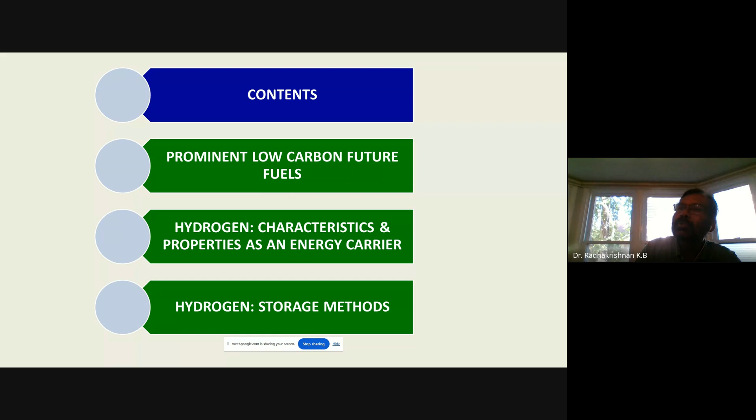So these are the contents that I have organized for the presentation. To begin with, I will be talking on the prominent low carbon future fuels, and then moving on to hydrogen, its characteristics, properties as an energy carrier, and also the pros and cons and the different types of storage systems. So this is what I would like to share with you in this talk today.

So actually what is being given is an approach to decarbonizing with the future fuels. We know that low carbon fuels are alternative fuels that release significantly lower greenhouse gases compared to conventional fossil fuels like coal, gasoline, or diesel over their life cycle.

These low carbon fuels play a crucial role in decarbonizing the hard to abate sectors, meaning majorly the industry sectors, aviation, shipping, and the long haul transport sector. A pragmatic approach to decarbonization is to have a step-by-step pathway to decarbonize the sectors that cannot be easily electrified using low carbon energy sources. So the target sectors are the hard to electrify sectors, which include aviation, heavy industry, and shipping.

So many of these sectors are really hard to electrify or to replace with low carbon fuels. The approach here is to go for future fuels that help reduce emissions without compromising on performance, and also to maintain and preserve the operational benefits. And also we have to encourage the use of existing infrastructure that avoids massive technology changes.

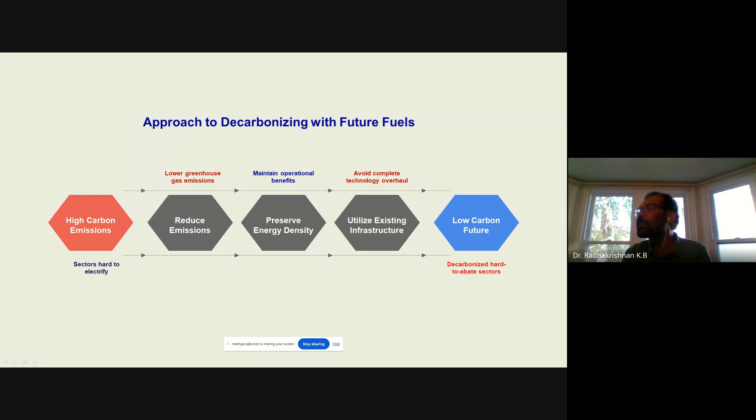So by definition, we can say that low carbon future fuels are energy carriers designed to replace fossil fuels in the hard to electrify sectors, while reducing greenhouse emissions.

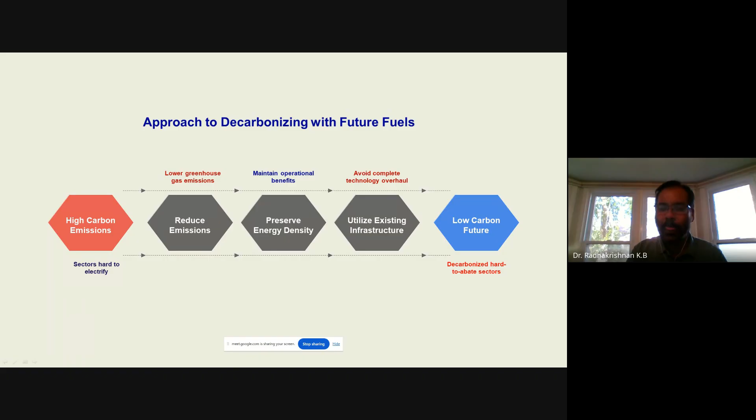Now, what are the prominent future fuels? Of course, there are a host of prominent future fuels. Out of this, hydrogen comes at the top. I think discussions have taken place in this FDP on hydrogen, so please excuse me if there is any repetition of the contents.

So hydrogen, or we can say green hydrogen produced through electrolysis using renewable energy sources, is considered the cleanest alternative fuel. Its production process involves using electricity generated from sources like solar, wind, hydropower to split water molecules into hydrogen and oxygen. These are the very fundamental things which every one of us know about it. The absence of carbon emissions during both the production as well as the combustion stage makes it an environmentally attractive option. So that is about the hydrogen part.

And next comes ammonia, which is also a low carbon, low emission future fuel. Ammonia is often synthesized from hydrogen and nitrogen through the well-known Haber-Bosch process. The traditional Haber-Bosch process actually relies on fossil fuels, but using green hydrogen in this process results in green ammonia. So ammonia also offers advantages over pure hydrogen in terms of storage and transportation, because it is easier to liquefy this ammonia and transport it in bulk

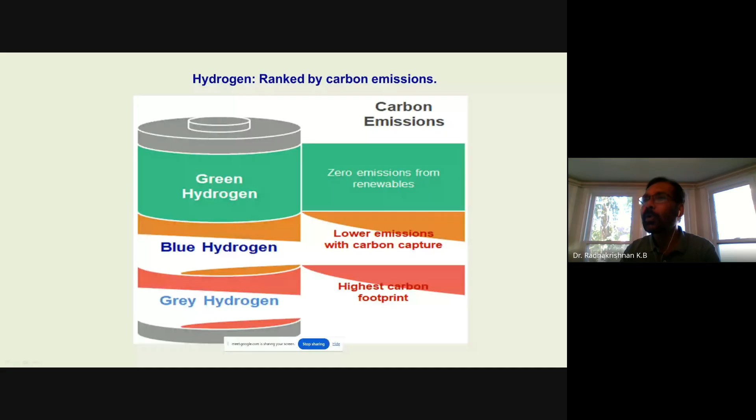But it is not considered a low carbon fuel, because the raw material used is natural gas.

We also have other colors of hydrogen: brown and black hydrogen. These are produced from coal gasification without any carbon capture technology. The distinction between black and brown is that black hydrogen is produced from bituminous coal, whereas brown hydrogen is produced from lignite. The process involves reacting coal with steam and oxygen at high temperatures to produce a mixture of gases, including hydrogen, carbon monoxide, and carbon dioxide.

This mixture has to be separated using appropriate methods. As to emissions, this method is the most carbon intensive way to produce hydrogen, as all the carbon dioxide generated is released into the atmosphere. Nothing is being captured in the black hydrogen segment.

Now we have purple, pink, or red hydrogen, produced by the electrolysis of water using nuclear energy. Next is yellow hydrogen, produced using a mix of energies - grid electricity using fossil fuels, coupled with other renewable sources of energy. The hydrogen produced this way is called yellow hydrogen.

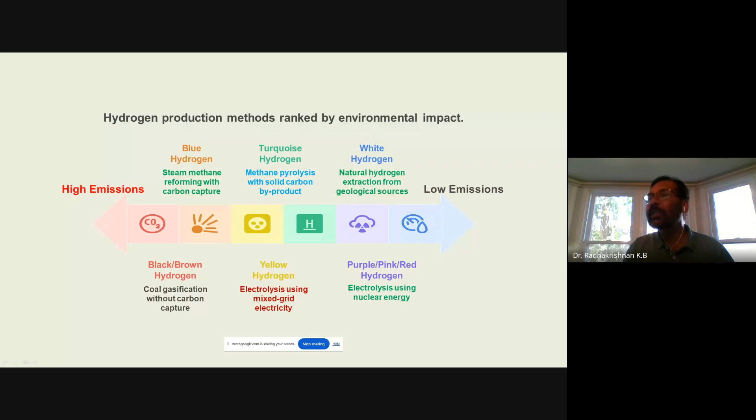The next color of hydrogen is white hydrogen. This is the geological form of hydrogen. Recent reports indicate this form of hydrogen is available in some geological formations in certain countries as hydrogen seeps. So white hydrogen is not produced through any industrial process, but is extracted directly from natural sources. The emissions associated with white hydrogen are primarily related to the extraction and purification, meaning the form of energy used for extraction. So if we use renewable energy sources for extraction, this color of hydrogen doesn't have any emissions.

Now, moving on from hydrogen, we can go to sustainable fuels. What are sustainable fuels? You can categorize a fuel as sustainable if it adheres to stringent regulations set by US or European standards. For a fuel to be fully or truly sustainable, it has to meet some requirements. It has to avoid land use change, meaning we should not use any raw material which causes deforestation or habitat loss. Secondly, we have to use non-food feedstocks wherever possible. Thirdly, we have to reduce the life cycle greenhouse gas emissions during the entire life cycle of the fuel. It also has to be part of the circular bioeconomy, and the use and consumption of water and fertilizers needs to be minimized.

These fuels have to comply with regulations like the European Union RED II, that is the Renewable Energy Directive, and another regulation of the US, the Renewable Fuel Standard, US RFS. So these are the two major regulatory frameworks that govern the production, blending, and sustainability of biofuels in the European Union and the United States.

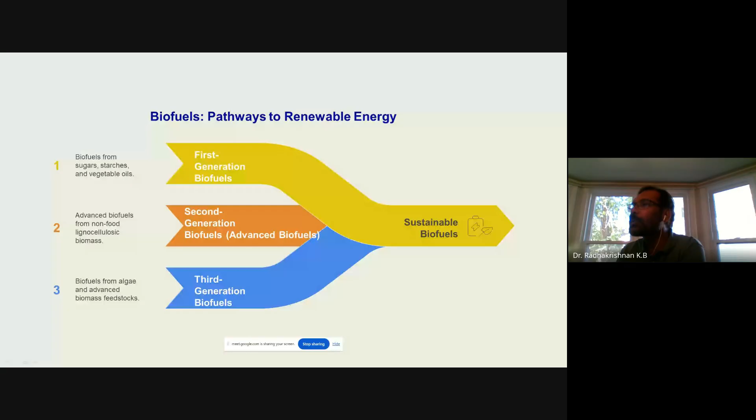Some of these technologies are called BECCS technologies, that means bioenergy plus carbon capture technologies. So these are the different generations of biofuels.

Now the pathways - what are the pathways to attain sustainable biofuels? These refer to the different technological and biological routes used to produce biofuels from renewable biological sources like plants, agricultural waste or crops, algae, or even municipal waste. But we have to ensure low carbon emissions and sustainability across the life cycle of the product.

Bioethanol, as mentioned, is produced by fermentation to convert sugars into ethanol using enzymes or microorganisms. That's the route we adopt in bioethanol production, which involves pre-treatment, enzymatic hydrolysis, and further fermentation. Bioethanol can also be used in blending with gasoline or petrol.

In India, we have set targets for bioethanol blending. Currently, in 2024, the target percentage of bioethanol to be mixed with petrol was 20%, but we nearly reached around 19% last year.

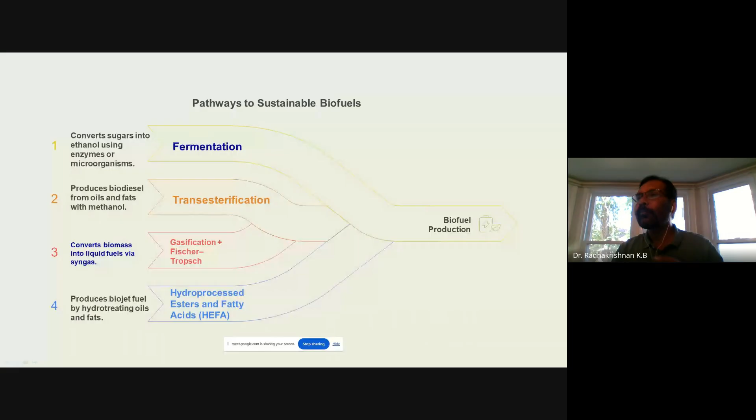Next is another technology on low carbon or future fuels - the Power to X technologies, called PTX technologies. On the left side is power, and on the right side you can have X - X could be anything. This refers to a family of processes that convert surplus renewable electricity, mainly from solar, wind, or hydropower, into energy carriers, fuels, or useful chemical products. Whenever we have surplus energy, this could be used to produce chemical energy carriers, fuels, or chemical products. This concept is increasingly important in the transition towards a low carbon economy. This technology enables sector coupling - connecting the power sector with the transport sector, industry sector, and heating application sector.

In Power to X technology, power means electricity generated especially from renewable energy sources, because renewable energy sources are intermittent. So whenever we have surplus energy, it could be converted into energy carriers, fuels, or useful chemical products. There are many technologies available under this heading, and out of these, some I would like to talk about.

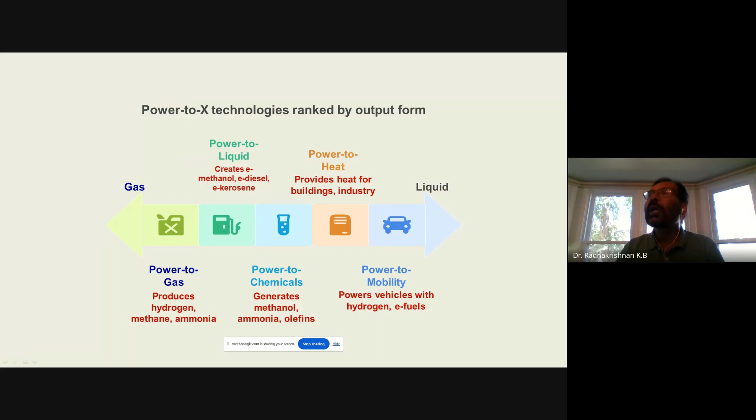Now let's look at how power to X technology is implemented, and what the pathway is. The pathway involves converting intermittent renewable energy into storable chemical fuels, P2X. This approach is used whenever we have surplus energy or energy available with intermittency, since solar and wind are not available all the time, only at selected times. So producing excess energy and then storing the surplus energy for later use can be beneficial. In such cases, we resort to power to X for low carbon fuels.

This involves mainly four steps. First is electrolysis, where we mainly focus on producing hydrogen from water electrolysis. This green hydrogen, obtained from electrolysis, becomes an energy carrier. Next is carbon dioxide, which can be obtained from many sources, but in power to X technologies, we only use captured carbon dioxide, either through direct air capture or from industrial emissions and flue gases. So we have two raw materials available: hydrogen and carbon dioxide.

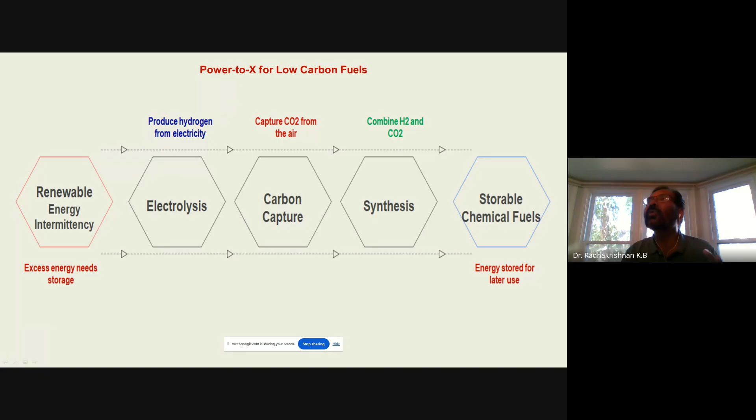Once produced, we move to the fourth stage, which is storage of these storable chemical fuels. These are synthetic fuels that are energy dense. The storable form of fuels has good energy storage potential. Having such high energy density, they are transportable, since a large amount of material can be stored in a small amount of space. We can also use existing infrastructure, and use the surplus energy for later use. So these are the steps, the pathways for P2X technologies.

In this technology, we pay some attention to ammonia under the power to chemical sector, because this is being largely discussed nowadays and has gained acceptance in recent times across many sectors. Ammonia is a chemical carrier of hydrogen. We know that ammonia, the molecular form of hydrogen compound, is NH3, comprising nitrogen and hydrogen.

So ammonia acts as a chemical carrier of hydrogen through a process that involves synthesizing ammonia from hydrogen and nitrogen, the raw materials, and then transporting this ammonia. Whenever we want to use it, this ammonia has to be cracked back to hydrogen and nitrogen at the point of use. The production of ammonia typically involves, as mentioned earlier, the Haber-Bosch process, which is a well-established industrial process.

But it may not necessarily use the hydrogen obtained from renewable sources. Here in this segment, that is power to chemicals, we have to use only renewable energy sources for the production of hydrogen. So solar, wind, or any other renewable energy resources can be used to produce green hydrogen.

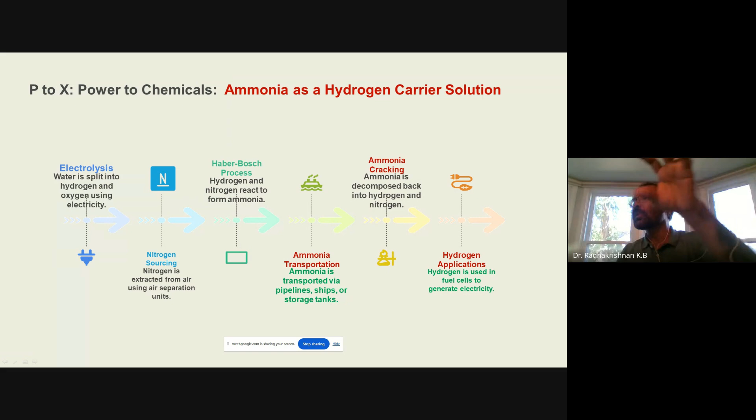So at the point of use, we have to get hydrogen. For that, the cracking of ammonia has to be done. This cracking means conversion of the ammonia at the point of use back into nitrogen and hydrogen. This also involves the consumption of energy.

But remember, we have to use only renewable energy sources for this cracking of ammonia back to nitrogen and hydrogen. The cracking process involves passing this ammonia over a catalyst—catalytic cracking at high temperatures, to the tune of about 700 to 900 degrees Celsius, using various catalysts like nickel, ruthenium, or iron-based catalysts. The choice of catalyst also affects the efficiency and cost of the cracking process.

The resulting hydrogen could be used at the point of application. That means we can directly use it in fuel cells to generate electricity by combining it, and water is the only product obtained in this. So ammonia is a potential

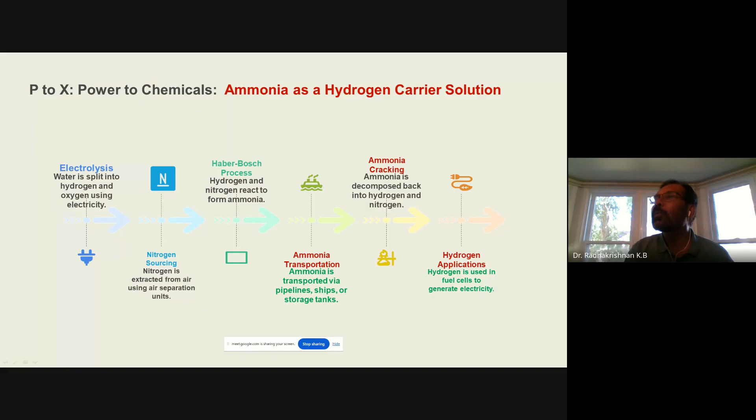future fuel. As to the merits: ammonia is carbon free. Ammonia combustion process produces no carbon dioxide, which means it facilitates decarbonizing sectors like power and transport. We can largely depend on ammonia in the power and transport sector.

And it has got higher hydrogen density. The formula of ammonia is NH3. Around 17.8% by weight of ammonia is hydrogen. This can be stored easily because the temperature needed for liquefaction is only minus 30 to 33 degrees Celsius for ammonia, compared to minus 253 degrees Celsius for hydrogen.

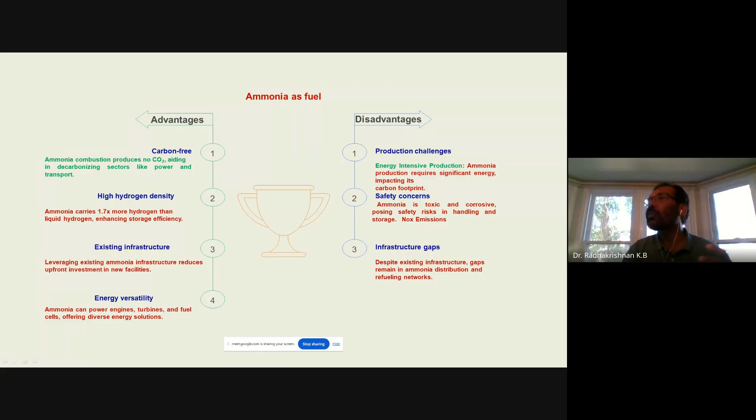Ease of storage also is there for ammonia storage. And also, the energy obtained from ammonia is versatile—ammonia can power engines, turbines, or fuel cells directly, offering diverse energy solutions.

As to the disadvantages, there are many production challenges, because the production of ammonia or green ammonia is energy intensive. It requires significant energy, which impacts its carbon footprint, so we have to strictly use renewable forms of energy.

And also safety concerns—ammonia is toxic and corrosive, posing safety risks in handling and storage. Another important disadvantage is that conversion or partial oxidation of ammonia at the point of use can result in NOx emissions—nitrogen dioxide or nitric oxide emissions. And also we have the disadvantage of infrastructural gaps.

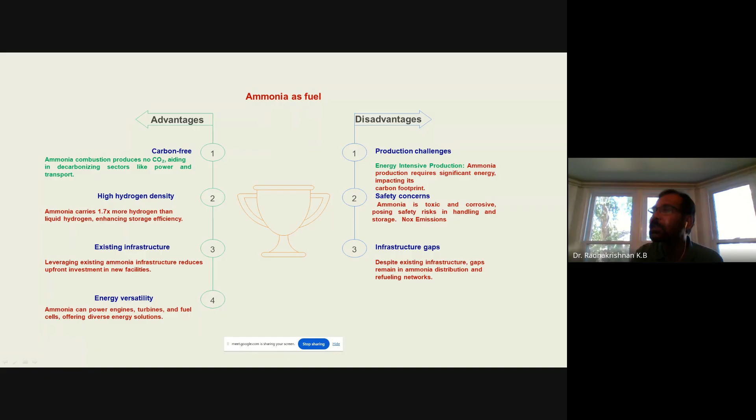We have the existing infrastructure, but still to go on a large scale application of ammonia, gaps remain in ammonia distribution and refueling networks. As to the applications, it can be used as a shipping fuel, the direct fuel in ships, and in power generation. We can use it directly in power plants, and it is used in fertilizer plants.

Now the pathways, as I have already mentioned about the production pathways of ammonia. The main method is the Haber process, but we need to use renewable forms of energy to produce hydrogen as well as nitrogen, so we can synthesize green ammonia. But this process is energy intensive and carbon intensive. Green ammonia production uses renewable energy sources like wind, solar, or hydro to power the electrolysis of water to produce hydrogen, to be used in the Haber process. So the form of energy used in the Haber process has to be fully renewable in nature.

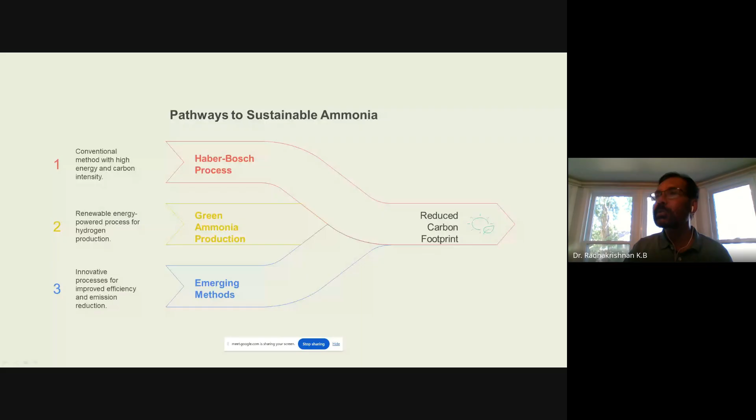Some other emerging methods are also coming in, the electrochemical and thermochemical processes. They have improved efficiency and reduced emissions. Such pathways are also available. So we can say that ammonia has a large role to play in the sustainable energy segment. It is used in power generation, transportation, industrial heating applications, and as a medium for renewable energy storage and transporting renewable energy.

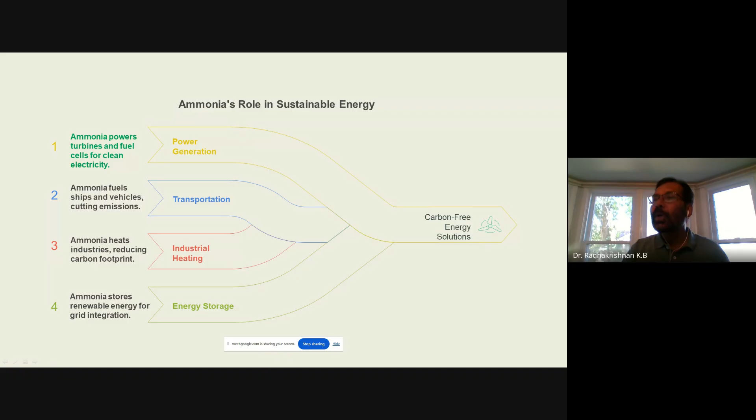Now following ammonia, we have the e-fuels. This also I have already mentioned. This represents a promising pathway for decarbonizing sectors that are difficult to electrify directly, such as the aviation sector or shipping sector. By utilizing captured carbon dioxide and green hydrogen to create liquid fuels, we get e-fuels, or electrofuels.

Many different forms of e-fuels are available, like e-methane. The process is called e-methanation, or electromethanation. It comes under power to X, P2X. Power to methane is a process that produces synthetic methane using renewable electricity, water, and carbon dioxide. Using renewable electricity from water, you generate hydrogen, and the carbon dioxide used is captured from industrial sources or from atmospheric sources.

The main steps involved are the electrolysis process to produce green hydrogen using renewable energy sources, and the methanation reaction to produce synthetic methane using carbon dioxide as a raw material. It is a Sabatier process where the green hydrogen is reacted with the captured carbon dioxide to produce methane and water. The reaction is carbon dioxide plus 4 hydrogen molecules giving methane and 2H2O. This reaction is highly exothermic and is a catalytic reaction taking place on a nickel-based catalyst at high temperature of 250 to 400 degrees Celsius.

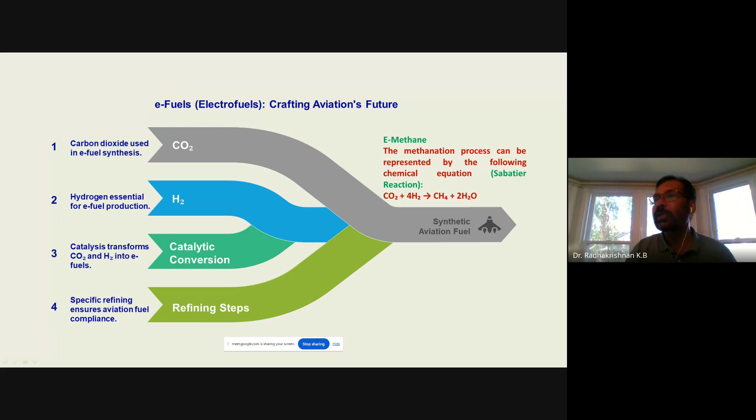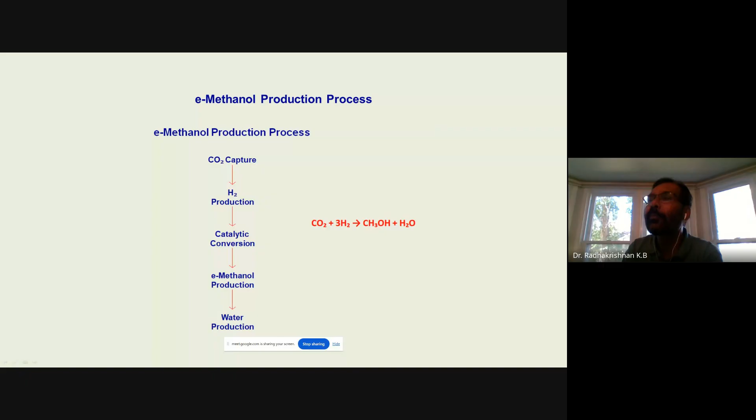In a similar way, we can generate e-gasoline or e-kerosene, sustainable aviation fuels. This is the process for e-methanol. You have to capture the carbon dioxide, produce the hydrogen electrolytically, and combine it in a catalytic conversion process reactor. You can generate methanol, but here also you need separation of this methanol from other gases. So this is the e-methanol pathway.

Methanol has got many applications. E-methanol has a wide range of applications across different segments. It is used as a fuel additive, with methanol blended with gasoline. Our country also is moving in this direction to promote blending, increasing the percentage of ethanol blending in gasoline or petrol year by year. This is a common practice in many countries, used as a sustainable alternative to fossil fuels, for reduction of greenhouse emissions.

Our country has formulated various policies under the National Policy on Biofuels, which was formulated in 2018 and updated in 2022. The target of the blending was 10%, and we achieved this 10% blending in 2022. Now it is 20%, called E20 - a 20% anhydrous ethanol blending target by 2030. That is the target set.

But actually, originally it was set for 2030, but now it is accelerated to 2025.

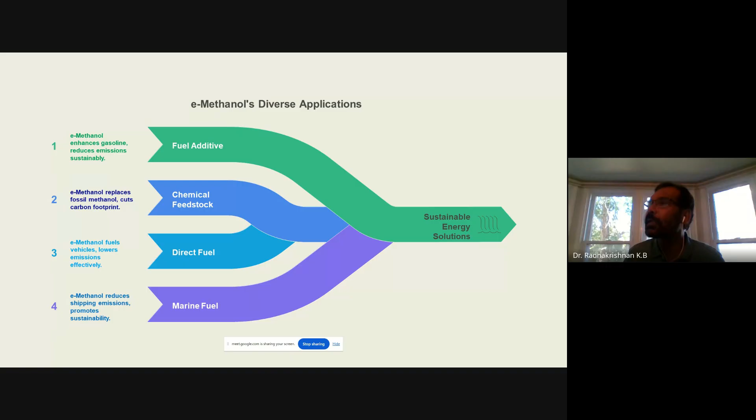E-methanol is also used in the marine fuel segment. This is gaining traction as a marine fuel due to its lower emissions compared to the heavy fuel oil used earlier. So this is a sustainable alternative for the shipping industry, and it helps reduce the environmental impact.

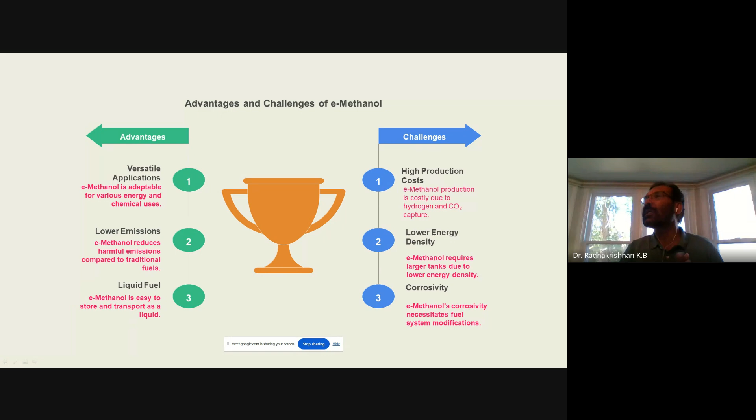As to the advantages and challenges: it has versatile applications, lower emissions, and it can be stored as a liquid fuel. That is another advantage of this methanol.

The challenges include the production cost, because we are using renewable forms of energy. With course of time, we can bring down the costs associated with the production of e-methanol.

The energy density of methanol is lower compared to gasoline, petrol, or diesel. We shall see the numerical figure of this energy density later. That means we need larger fuel tanks to store it. In a given space, you can accommodate only a lesser amount of methanol because its energy density is less.

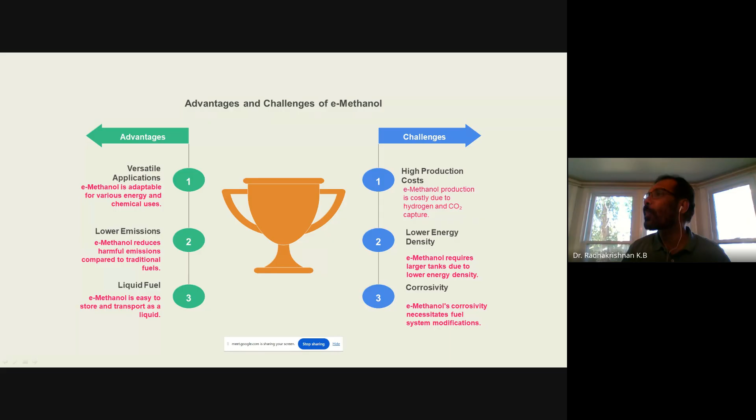Another disadvantage is the corrosivity of methanol. Methanol can be corrosive to various materials, which means this requires modification to the fuel systems and engines.

And next is the kerosene, or synthetic aviation segment. We normally resort to the production of synthesis gas, then the Fischer-Tropsch process. All chemical engineers must be aware of the Fischer-Tropsch process. We can produce many chemicals from syngas production.

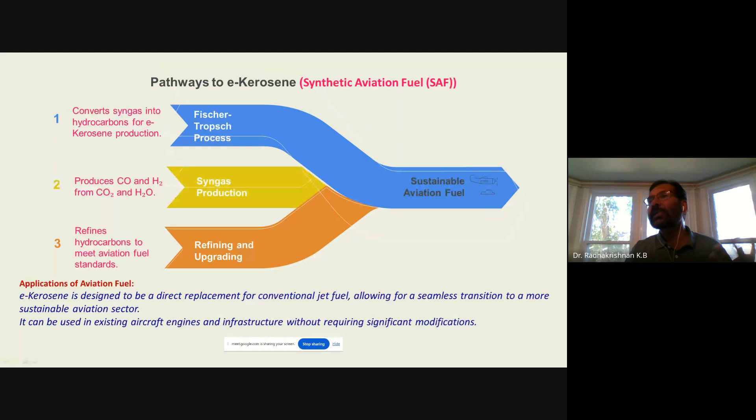If you want to get sustainable aviation fuel, further refining and upgradation is required, meaning purification, because it has stringent conditions to be used as sustainable aviation fuel. So applications of aviation fuel are a direct replacement of conventional jet fuel. This allows for a seamless transition to a sustainable aviation sector, used in existing aircraft engines without subjecting existing infrastructure to modifications.

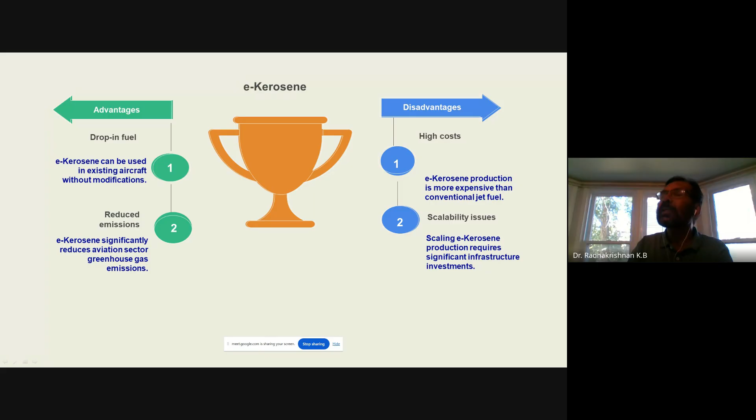E-kerosene also has many advantages. It is used as a drop-in fuel, meaning e-kerosene can be used in existing aircraft without modification. That is one of its advantages. And it has reduced emissions—it significantly reduces the emission of greenhouse gases in the aviation sector.

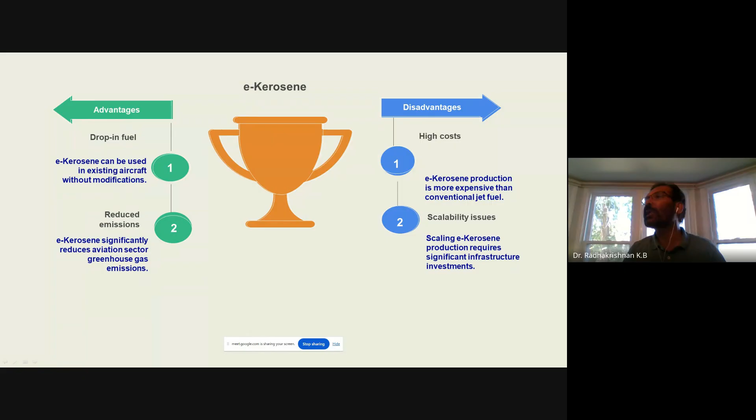The disadvantages are the expensive nature of production compared to conventional jet fuels from petroleum sources, and also scalability issues. Scaling up the production of e-kerosene to meet the demand of the aviation sector requires significant investments in infrastructure and technology. So these are the challenges involved.

And hydrogen, of course, has versatile applications. It can be used in decarbonizing industries, especially the steel making industry. We know the emissions taking place from steel industries are enormous. So we use hydrogen to produce energy to decarbonize the steel industries using the direct reduced iron process.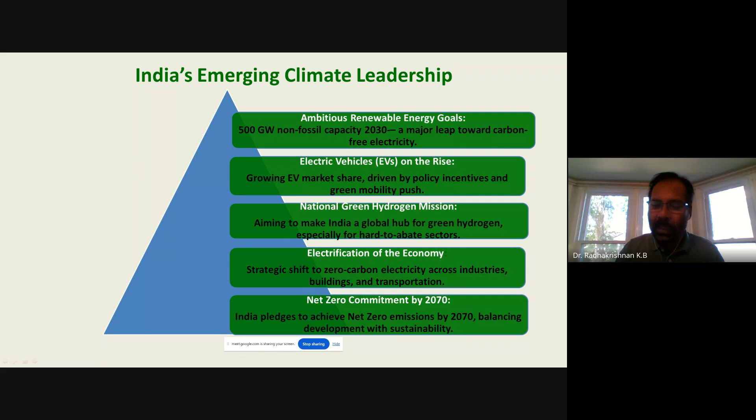India has also set its emerging targets and taken a leadership role in this. Many targets and missions have been set, like the hydrogen mission. We do have our share in controlling climate change, like ambitious renewable energy goals, the promotion of electric vehicles, the national green hydrogen mission, electrification of the economy, and the net zero commitment by 2070. These are some of the leadership roles that India has already taken in this direction.

Now comes the last part of this presentation, that is on hydrogen. Why do we have to go for the hydrogen economy?

Hydrogen is a versatile energy carrier, produced from various sources including renewable energy, natural gas with carbon capture, and nuclear power. It can be used in fuel cells and IC engines. Hydrogen produces water as a byproduct, so it is potentially a zero emission fuel. It is the most abundant element in the universe, making up about 75% of the elemental mass of the universe.

Most of it exists as hydrogen gas in stars, where it is the main fuel for nuclear fusion, like the sun. 90% of the number of atoms in the sun is hydrogen. In general, the sun contains 74% hydrogen and 24% helium by mass.

So hydrogen is not an energy source by itself, like fossil fuels or sunlight, but it is more like a battery - it stores and delivers energy. We use electricity, ideally renewable, to split water into hydrogen and oxygen via electrolysis, storing the energy from the electricity. We can release the energy by combining the hydrogen and oxygen in a fuel cell or burning it to produce the byproduct water.

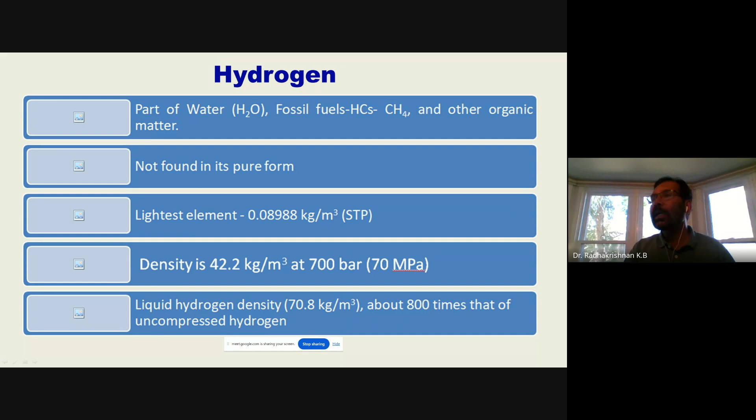So why is hydrogen used? As said earlier, hydrogen is an abundant and clean fuel with a gravimetric energy content of about 122 to 142 megajoules per kg. This is much higher compared to diesel or other fuels - about 3 to 3.5 times that of conventional fuels.

As said earlier, combustion of hydrogen does not produce any carbon dioxide, so hydrogen has got global acceptance as an environmentally safe fuel.

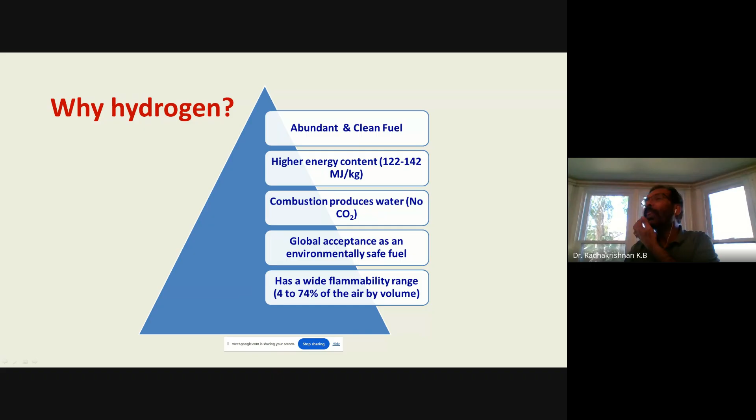Now, looking at the properties of hydrogen is very important. I will touch upon some of the very important properties that are essential to look at.

Its boiling point is about minus 252 or 253 degrees Celsius, which is about 20.28 Kelvin. So hydrogen has a very low boiling point, necessitating liquefaction at cryogenic temperatures for efficient storage and transportation in liquid form. So cryogenic storage is required.

It has a lower heating value of about 120 megajoules per kg, that means 33.3 kilowatt hours per kg - every kg of hydrogen can generate about 33.3 units of electricity. So hydrogen possesses one of the highest energy contents per unit mass compared to all fuels.

On the higher heating value - I'm not explaining exactly what higher heating value or lower heating value means - this is with the vaporized water vapor component, which has a higher latent heat of vaporization, so the heating value increases. The higher heating value is 142 megajoules per kg.

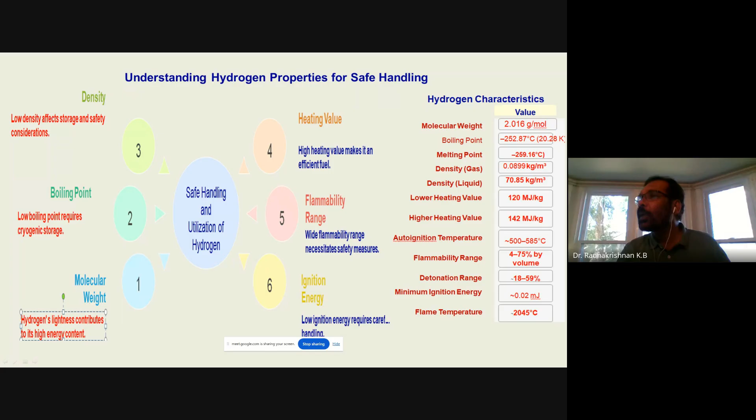Hydrogen combustion produces a very high temperature flame, more than 2000 degrees Celsius. This is highly beneficial for certain applications, but also requires appropriate materials to withstand the heat. The detonation range is also destructive, so we have to be careful about handling this.

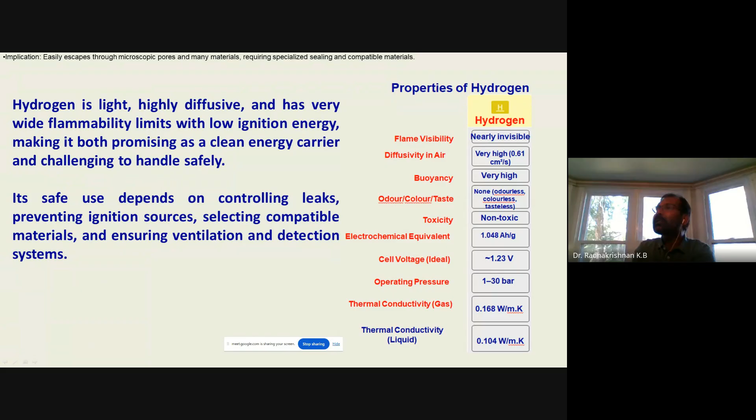In general, hydrogen has very high diffusivity and permeability. It can easily escape through very small pores in many materials. We cannot use conventional materials for storing hydrogen; this requires specialized sealing and compatible materials.

Hydrogen can cause burns because the flame is invisible, sometimes pale blue. The radiant heat is low, so you never get hurt if you approach near it, but direct exposure is hazardous. Since flames may be difficult to see, you have to use either UV detection systems or infrared sensors, which are highly essential.

The burning velocity of hydrogen is also very high, about 2.65 meters per second. Compared to methane, which propagates at only about 40 centimeters per second, hydrogen flame propagates at about 2.65 meters per second, so hydrogen detonations are more violent.

Another problem with hydrogen safety is cryogenic hazards with liquid hydrogen, since we use extremely cold conditions, minus 253 degrees Celsius in storage. This causes frostbite, cold burns, and hydrogen embrittlement of materials. In cold storage, it also causes boil-off and pressure build-up because it evaporates very fast, so storage systems require pressure relief valves.

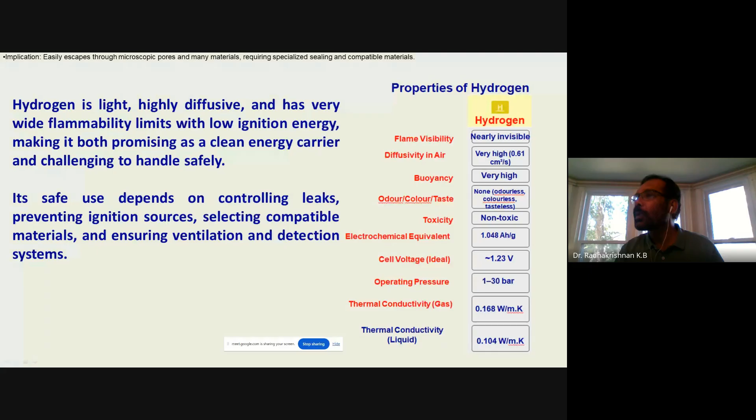Material compatibility is also very important. We use special stainless steels and special aluminum materials; high strength steels are avoided. Even the gaskets and seals we use—many common elastomers—are permeable to hydrogen, so we have to use special purpose materials for this.

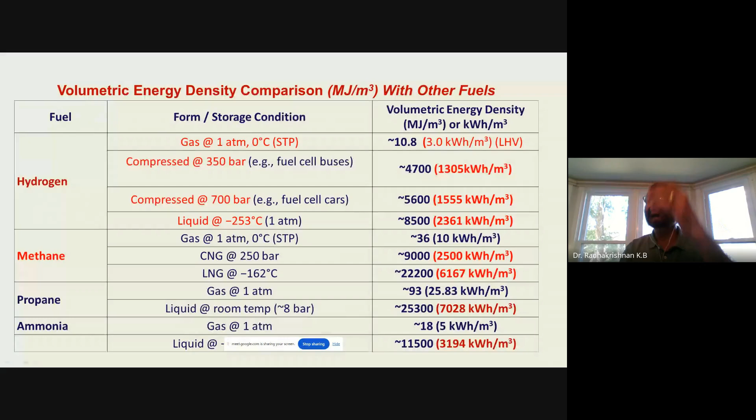This table gives a comparison of the volumetric energy density with respect to other fuels: hydrogen, methane, propane, and ammonia. At ambient conditions, hydrogen has an extremely low volumetric energy density of 10.8 megajoules per meter cube, which is far below methane, propane, or ammonia.

When compressed to 350 to 700 bars, or liquefied at cryogenic temperatures of minus 253 degrees Celsius, hydrogen acquires a higher volumetric energy density of about 4,700 to 8,500 megajoules per meter cube. But this is still significantly lower than liquid hydrocarbons, which have an energy density of more than 22,000 megajoules per meter cube, and liquid propane used for domestic applications, which has an energy density of about 25,000 megajoules per meter cube.

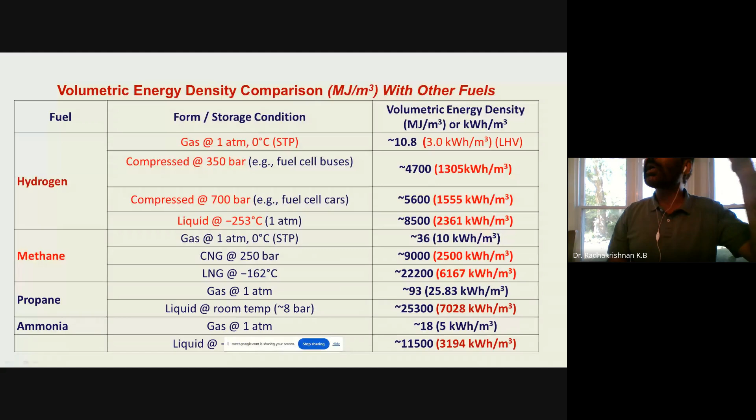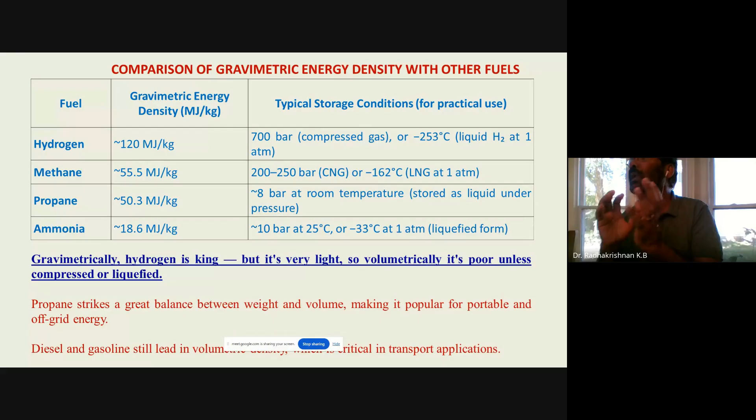Even ammonia has a volumetric energy density of 11,500 megajoule per meter cube, so that is one of the limitations of hydrogen. But this table gives a comparison of the gravimetric energy density. Hydrogen has got an excellent gravimetric energy density. So we have to strike a balance between weight and volume. Gravimetrically hydrogen is the king, but it's very light, so volumetrically it is poor.

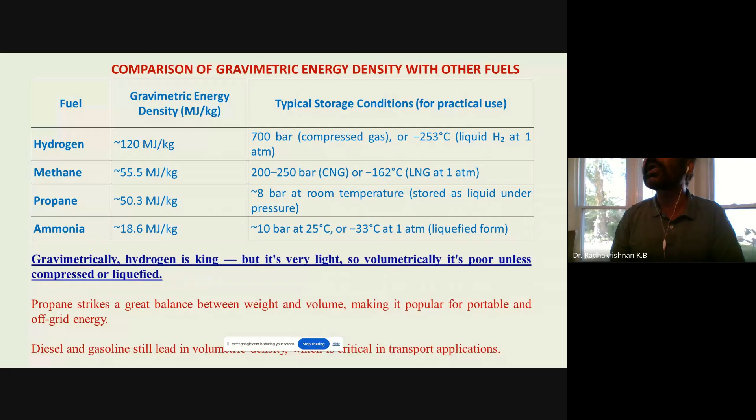In terms of explosive limit, this gives a comparison of the explosive limits of various fuels. For hydrogen, the flammability range, between the lower and upper flammability limits, is 4 to 75%. Whereas acetylene's range is between 2.5 and 100 percent.

In conclusion, hydrogen exhibits good engine performance, flame propagation length, and improved power output. A larger explosive limit has advantages for performance, especially in combustion systems, so hydrogen is used in rocket engines because of this larger explosive limit.

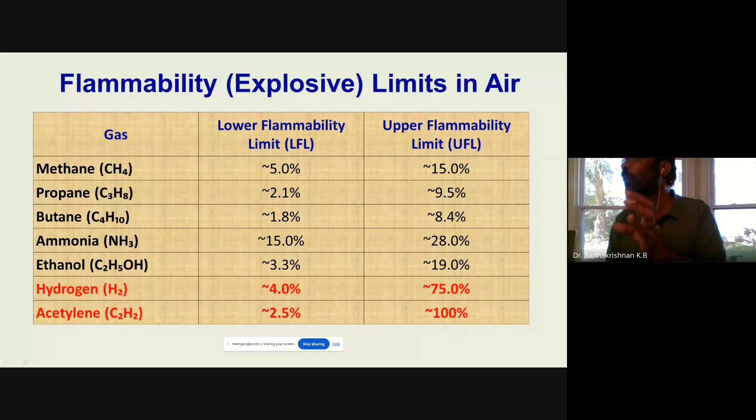And the higher inflammability range means higher safety risk, so this requires robust handling, storage, and detection systems. There has to be a trade-off between all this—great for controlled energy systems, but potentially hazardous if not managed properly.

As I said earlier, hydrogen, in a nutshell, is an energy carrier, not a primary energy source. It is derived from many other sources, so hydrogen can be considered a secondary source—an energy carrier that stores and transports energy.

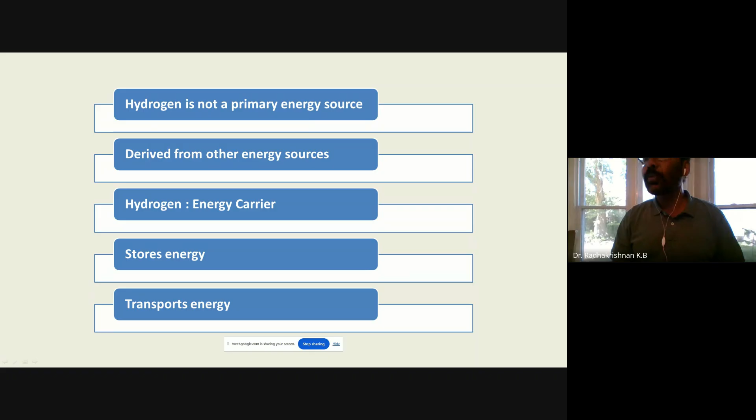The challenges are many in hydrogen storage, with different storage technologies used. We have compressed hydrogen storage to enhance the density to 42.2 kilogram per meter cube; if compressed to 700 bars, it's used in mobile transport in trucks, rails, and underground pipes. Liquefied hydrogen storage is available provided you cool it down to minus 253 degrees Celsius.

There are many other storages. Secondary chemical carriers include ammonia, and another chemical storage called liquid organic hydrogen carriers, LOHCs, because it's liquid. Some liquids can absorb this hydrogen, and the absorbed hydrogen could be retrieved at the point of use by providing additional energy to it.

Another form of energy carrier is ammonia, also a chemical form of hydrogen storage. Methanol is again a chemical form of hydrogen storage, and we also use metal hydrides as another storage method.

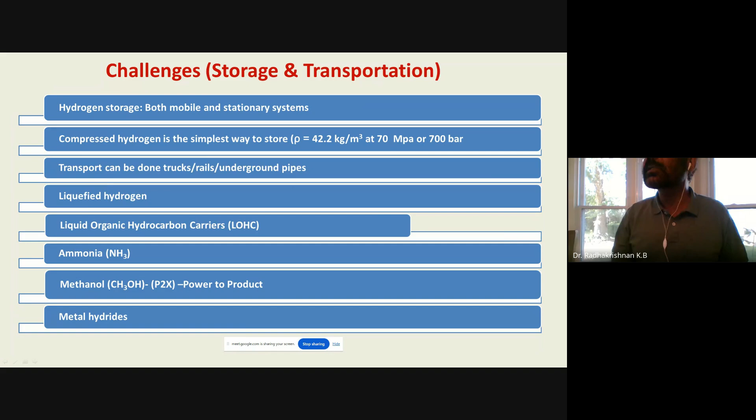Now I'll wind up in a few minutes. As for storage, hydrogen as a gas requires pressures to the tune of about 350 to 700 bars—that's the desired tank pressure. If you want to use it in buses, we can use it at 350 bars. For cars, the pressure range involved is very high because only a small storage volume can be made available in a car to run large distances.

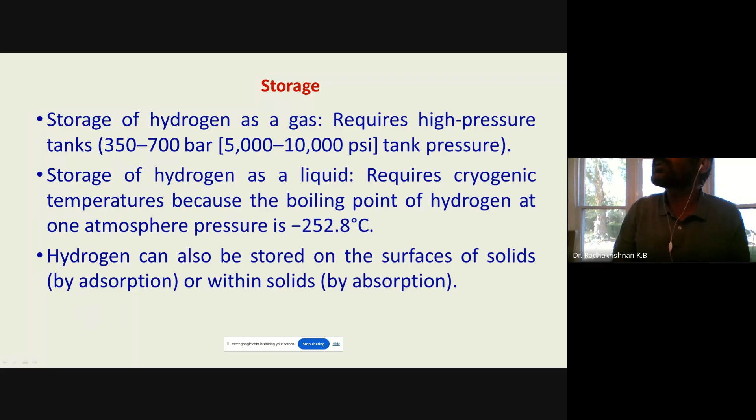In liquid form, it has to be cooled to cryogenic temperatures down to minus 253 degrees Celsius. Hydrogen can also be stored on the surface of solids like metal hydrides, or within solids by absorption. Many technologies are available—these storage systems are physical based or material based.

In physical based storage, you can compress the gas using cold compression techniques, or store it in liquid form. In material based storage, we have many technologies: adsorbents, metal organic frameworks available to store hydrogen, liquid organic systems, and different forms of metal hydrides like complex hydrides, chemical hydrogen systems, and interstitial hydrides. These systems have their own merits and demerits.

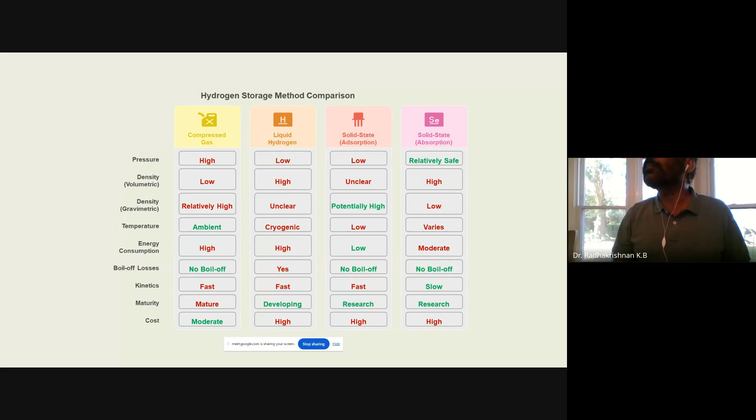In general, physical storage methods such as compressed gas and liquid hydrogen are technologically mature and can deliver higher densities, but demand either extremely high pressures or cryogenic temperatures. This leads to energy intensive and complex storage systems.

But material-based storages like adsorbents or liquid organic hydrogen carriers, or metal hydrides or chemical storages, have problems including volumetric efficiency, safer handling issues, and integration with existing liquid fuel infrastructure.

However, we can say these approaches are still limited by slow kinetics. Metal hydrides have very slow kinetics involved, so we need higher regeneration temperatures while regenerating hydrogen from these hydrides.

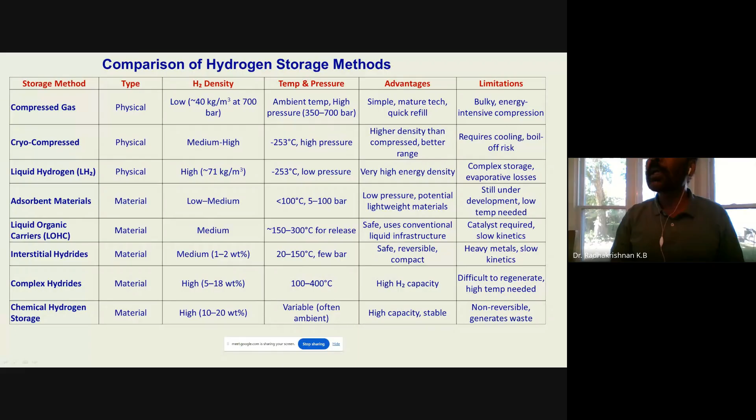Because of incomplete reversibility, we cannot retrieve a complete amount of hydrogen that has been absorbed in the metal hydride. So chemical hydrogen storage refers to materials or compounds that store hydrogen in chemical form, which can release hydrogen through chemical reaction. These storage systems are not reversible because it is already transformed to another form of chemicals.

For stationary applications, we use metal hydrides or chemical hydrides because they have higher volumetric storage efficiency and good safety and stability. But as it is heavy, it is not suitable for mobile use.

In the mobility sector, what is recommended is to go for composite pressure cylinders to tolerate pressures to the level of 350 to 700 bars, and also cryogenic tanks for transportation, which are also used in the mobility or transport sector.

Because they have got higher gravimetric efficiency, they are widely used in fuel cell electric vehicles. But the disadvantage is the lower volumetric efficiency, meaning it requires more space.

For long distance transport and flexible storage, what storage mechanism do we depend on? We use LOHCs, liquid organic hydrogen carriers, a system normally used for long transport and flexible storage. Or we can go for methanol, ammonia, or synthetic fuels because we can use existing liquid fuel infrastructure.

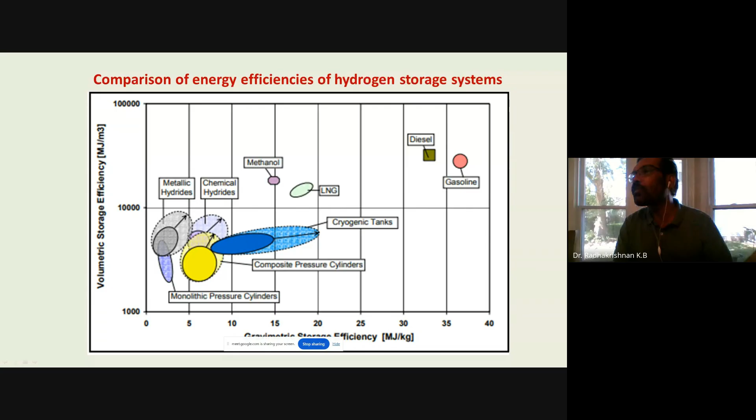We can have a comparison between diesel and gasoline. These two fuels have high efficiency in both mass and volume, and this serves as a target reference for future hydrogen carriers.

In conclusion, transitioning to clean energy from fossil fuel dependence - the shift has to be gradual rather than rapid. We need a gradual shift with economically viable transition and implementation of carbon capture and utilization systems.

Transitioning to blue hydrogen production also needs to be promoted. Further, we have to move on to clean energy, a carbon dioxide free energy system. This shall be the roadmap towards attaining the clean energy system.

In conclusion, we can say the adoption of low carbon fuels is vital to achieving global carbon goals and securing sustainable energy systems. Emerging options such as green hydrogen, ammonia, biofuels, and synthetic fuels will definitely play a pivotal role across many sectors like transport, power, and industry.

But the path to large-scale hydrogen deployment requires a phased approach. We cannot all of a sudden have a hydrogen economy. Although some roadmap has been drawn, even the Kerala government has drawn a roadmap and started Hydrogen Valley operations with the support of ANERT.

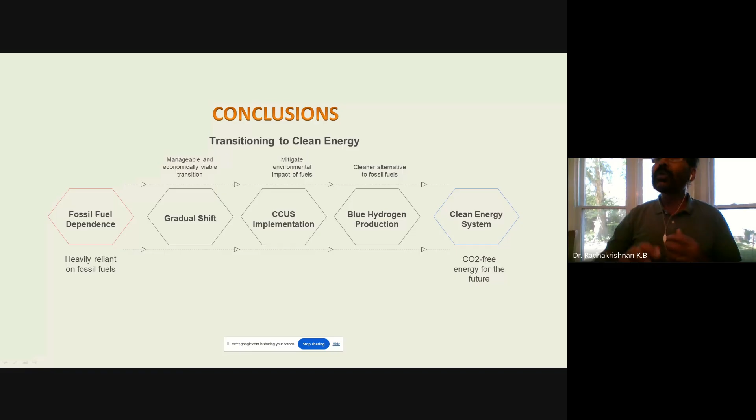Advancing through blue hydrogen today, while preparing for a green hydrogen future tomorrow, shall be a pragmatic roadmap towards a cleaner, resilient, and net zero energy future. So this is all about my discussion. Thank you.